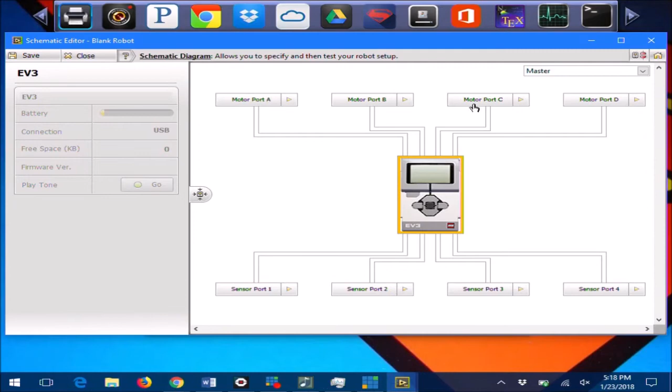Depending on what kind of robot you built, this is going to change. I have just the base robot built here. So for my particular robot, I've got a large motor on port B and port C. I have another large motor. So let's go ahead and do that.

Now again, if you're using the NXT kits, you will simply choose the NXT motor, and your brick will look like an NXT, the older style brick. It should be a very similar process.

One thing you actually can do in this, which works out to your favor, is you actually can name these, like I can say left underscore motor.

Another thing you can do from this window is check and see if the motor actually works. You can run the motor. I'm not going to do it now for the sake of time. You can run it forward, backwards to see if everything works. The encoders are working, so just to make sure all your sensors work.

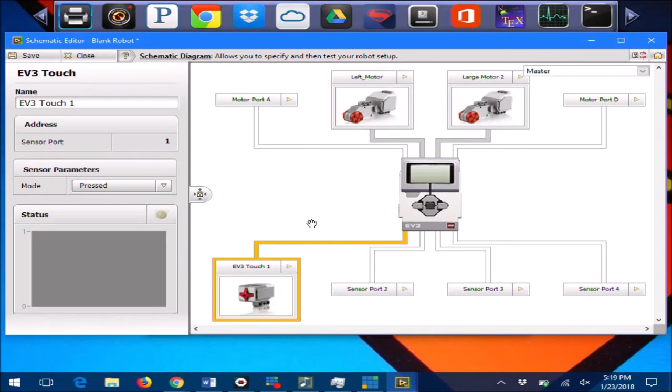Now in my case, in sensor port 1, I have a touch sensor, and in sensor port 4, I've got an ultrasonic sensor. Again, it depends on what kind of robot you have and you've built. Everybody's going to be slightly different compared to that.

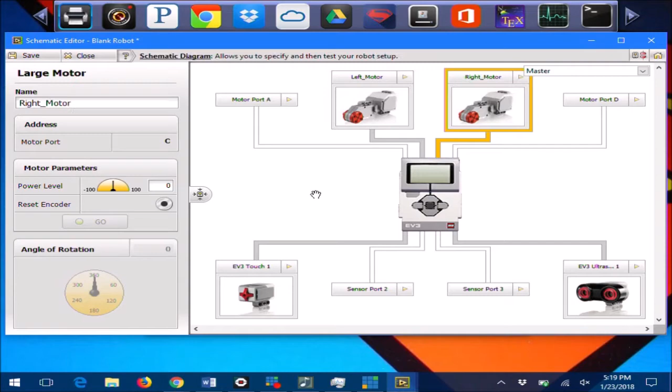Alright, so after that, again, I'm just going to leave my name the default. I might name this one right motor just to make it consistent here. And again, it's going to be on port C. I'm going to go ahead and save that schematic. I'll go ahead and close out of the schematic entry window.

And then I'm going to say a new VI, a new NXT or EV3 target. So I'll call this the same name, Lab 2 V3. Alright, it's going to come up with your two windows.

So again, if you've never programmed in LabVIEW before, this is going to be fairly new. The left window is called the front panel, and that's like your graphical user interface. You're not going to do a lot with that in this class until later on in the semester. The right panel, which is the block diagram, is what we're worried about. This is where all the programming takes place.

So I'm going to minimize this for a moment and then make this full screen. So if you look here at the bottom left-hand corner, it says EV3 USB. That's how you know you're connected to your EV3 or NXT kit, and you have the correct instance installed.

So again, kind of get you a little bit familiar. I'm not going to go over this in detail because there's literally hundreds of YouTube videos out there on the basics of LabVIEW and basics of this stuff. So we're going to go through this pretty quickly.

So at the very top, you've got the run button, the deploy button, which should be very similar to the buttons down here in the corner. Let's get rid of all this.

So the same thing as the deploy here is the exact same thing as the deploy in the LabVIEW software. This stuff up here you're not going to worry about so far.

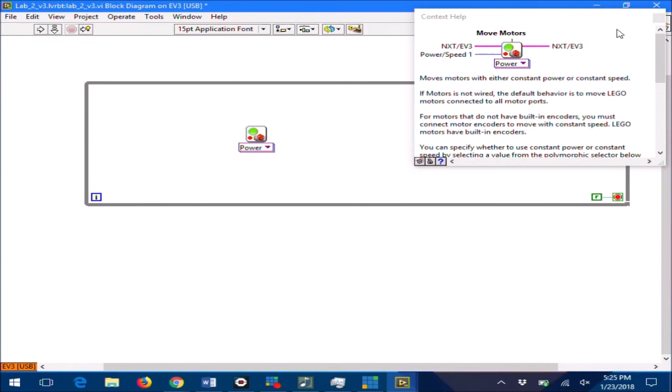So at any time when you're first learning LabVIEW, I would suggest keeping this little context help menu up. This shows you a description of what every single one of these inputs and outputs are supposed to be. You can also say detailed help, and it'll let you know exactly what each one of those inputs are supposed to be. So in our case, we know we can add some motors to the top of this.

That's what we're going to do. Again, I'm moving fairly quickly just because there's tons of tutorials out there on this information, and plus, I'm going to post this video.

So I can right-click on any kind of terminal, and it'll give me an options menu that's specific to that terminal. Notice how when I click on the NXT EV3, it gives me the I/O palette and the cluster palette. But when I click on motors, it only gives me the I/O palette and the numerical palette. So it depends on what node you press on—your context menu changes depending on what you press.

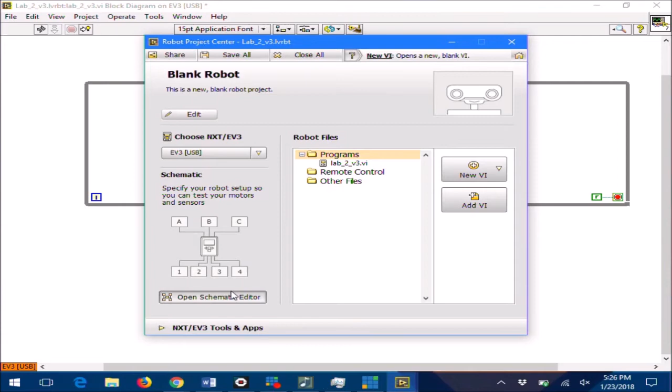So in our case, let's go ahead and create a constant for our motors. This is where naming your particular motors inside of your schematic editor is important. Recall that we named the motors left motor and right motor inside of this schematic diagram editor—left motor, right underscore motor.

That's actually going to show up here under our drop-down list. So there's my right motor, and it'll go ahead and add the right motor. It takes a few seconds to load that particular subroutine. Then I can add another motor using the drop-down box, and of course I'm just going to use the left motor in this case. If you use the smaller motors inside of your design, you can choose the little small motor from this as well.

So there's my two motors. Notice how the icon dynamically changes depending on what you feed into it. Before I only had the option for one power/speed input. Now I have the capability of doing it for two of them.

So let's go ahead and right-click on one of these terminals and say create a constant. If you recall in the other software, the EV3 software, 75 was just the default power speed, correct? Same exact thing. The reason why they're the same is this EV3 software is actually built on top of LabVIEW. So you don't know this, but you're actually running LabVIEW in the background—see here, powered by LabVIEW.

What it's done is it's added one more layer of abstraction to take away some of the stuff we're doing here. It just makes it real simple for kids and stuff to look at.

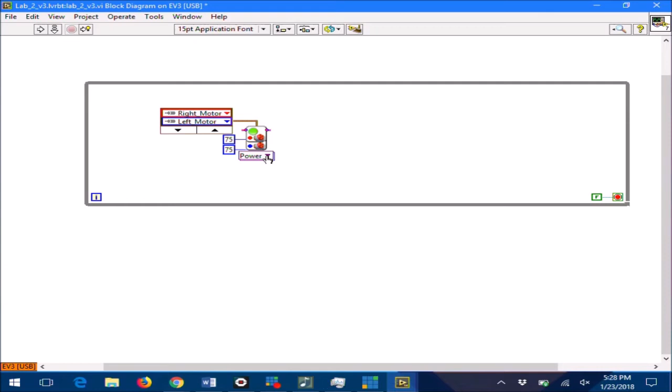All right, so I can go ahead and say create another constant here and have 75 for both of my motors. You also can choose a dynamic instance. Does anybody remember what overloaded functions were in C++? You can have multiple instances of the same function. Same exact thing in LabVIEW.

You can have the constant power instance of this particular function, or you can have the constant speed instance of this function. And the detailed help will explain all these different options that you have available to you.

So the first thing it's asking for that you may not know is you have to actually initialize the EV3 kit, whatever you're working with. Luckily for us, we already have the EV3 initialized at the bottom left because it says EV3 USB is connected. And let's do something else important here.

Let's go ahead and make this into a case structure. So go under your structures, go under your case structure, and let's only move the motors forward if, I don't know, the touch sensor is pressed—how about something like that? So let's go ahead and go to our I/O. We can go under our read sensor icon.

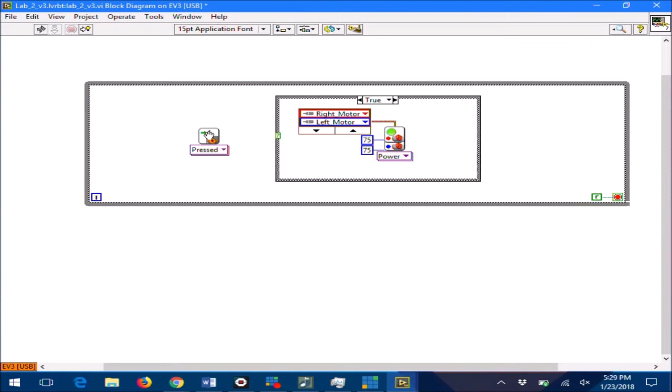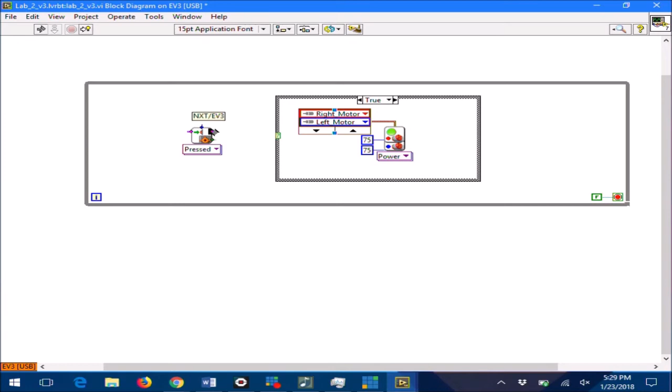Again, with the convention, the left sides are inputs, right sides are outputs. Notice how this says NXT EV3 - we've seen this before. That's an input to the next one, so let's tunnel that through into our EV3. This is analogous to passing variables inside of a function - nothing new here. We're just passing variables from one function to another. You essentially do that in LabVIEW by connecting these two panes to each other.

Let's go ahead and look at the output. Another thing I want to mention, if you've never looked at LabVIEW before, is the color convention inside of LabVIEW - the colors are significant. This pinkish color is actually a string, the bluish color is an integer, doubles are orange, Boolean is green - true, false. I'd suggest going and looking at some of these tutorials before you get started programming.

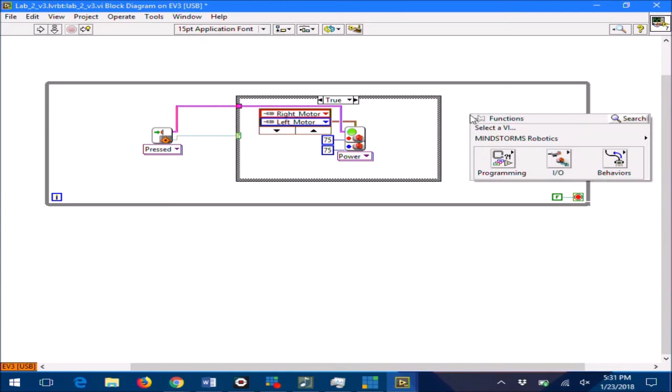So in this case, this particular case structure is looking for a true, false, some kind of Boolean input. The case structure is analogous to the switch statement in the old program we used - it dynamically changes depending on what you pour into it. I can port in this yes/no Boolean answer into the case structure, but let me show this - let's copy this 75 block, Control-C, Control-V, tie that into the case structure, and now it becomes a numerical case structure. Does that make sense? Everything dynamically changes based upon what input you give it.

A lot of this stuff is not really given to you - you just kind of have to figure this out over time. Feel free to email me if you have questions on how to port one code to the other, but make sure you include screenshots of what you have so far.

Now, has anybody got any questions so far? I know it's throwing a lot at you at one time, but again, there are a lot of tutorials out here on this. Yes? Yeah, still do Thursday.

Still do Thursday. It's due Thursday because what you were supposed to do is make like a 10-icon program in the EV3 software. How many of you actually did that? Simple program - it just goes, stops, end, something like that. You guys should have no problem.

If you didn't do that, what I would suggest doing is rethinking your algorithm from Lab 1. Even though I said try to make it as close as you can, if it was me, I would rethink what I did for Lab 1 to make it as simple as possible, to meet the minimum requirements.

What are the minimum requirements? Anybody remember? Three sensors that do something. You can just touch the sensor, touch another sensor, and do something with the ultrasonic, and that's it. So that's what I would suggest - it may take you a few extra minutes just to revamp your code inside of the EV3 software, but make something very simple.

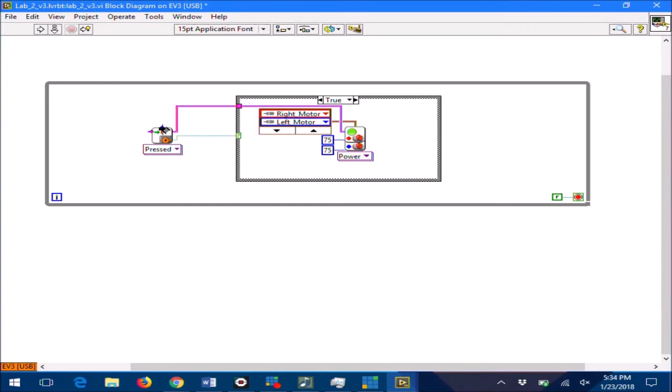Okay, I've actually got to exit out of this program because it's taking up the EV3 instead of LabVIEW, so let me exit out of this. That's another important note too: you can't have both softwares open because the EV3 is going to recognize itself in one of the two softwares and it won't be available in the other.

So now I should be able to disconnect, connect it again, and it should show up. Let's see what happens here. So let's choose our EV3. Everything's okay, alright, so let's go ahead. Again, there's two options: there's this run and there's deploy. We use deploy typically with our other software. So I'm taking a second to download. It does the exact same sound as the other software when it downloads.

So again, I'm going to go into my robot, and it should - let me pull up the document camera - and it should show up as whatever you named it. In this particular case, it's Lab 2 V3. Does everybody see that? That's what I called it inside of LabVIEW, so everything should work the same.

So I go ahead and press play on this guy. When I press the sensor in, it runs. It's just going to keep going because I don't have anything to stop it from running. Top left button is the stop for that. Okay, alright, so any questions so far on what I did? Everybody good? Or sort of good?

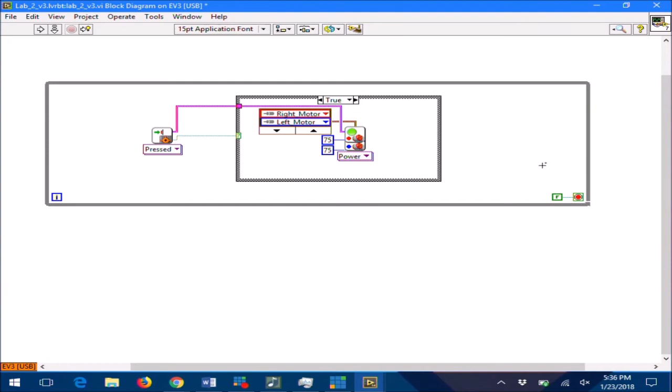Is there a way you can change variables or put variables in stuff? Oh yeah, I mean there's basically anything you can do with regular traditional programming you can do with this.

Speaking of which, if you get really stuck inside of LabVIEW, but you know essentially what the C code should need to do to make the same action, what you can do is - let's see if they have - I don't think this particular form of LabVIEW gives you that option.

Okay, but yeah, definitely the main palettes that we're looking at for this assignment is going to be the structures palette that gives you your while loop and your case structure, which is going to be your switch. Anybody do the Boolean operators in here, like the and, or the stuff like that?

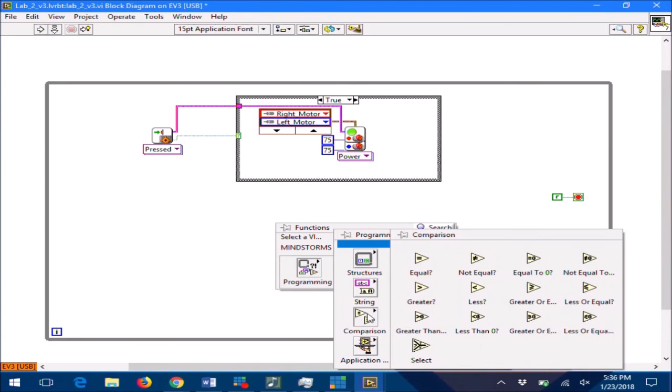So that is located under programming, under the comparison, there's equal then. You can also do the Boolean here, which has and, or, all your different kind of Boolean operators are here.

Again, if you find yourself spending a long time with this and you can't get your exact code ported over, just do something simple on the other side. See what I'm saying? I don't want you to spend forever on this. I just want you to kind of get familiar with LabVIEW.

Okay, so let's go ahead and look at adding another sensor to this. The only other sensor that I have on my robot now is just the ultrasonic sensor. That's all I have, that's all I had time to build for.

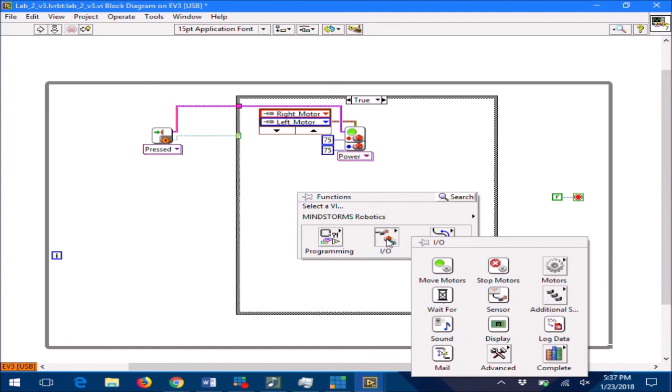So let's say that if the sensor is pressed, it goes forward, but inside of that case structure, which again will automatically grow depending on how I move it around, let's go ahead and introduce another case structure for the other sensor. So let's go ahead and get the ultrasonic sensor.

So we can choose - it defaults to the touch sensor. I can choose the EV3 ultrasonic. Again, if you're using the NXT kit, you're going to choose from these particular sensors here, okay? So let's choose the EV3 ultrasonic.

And again, the same options are available to you, so you can choose centimeters, inches, or just listen for. I'm going to choose inches. And again, you have to tie in your EV3 into it because you're passing that same variable into that particular block.

Again, in this case, it defaults to port 1, so I'm going to create a constant here. Now, my ultrasonic sensor is actually on port number 4. Let me just double check that here.

Yes, on port 4. So I want to choose from the drop-down menu to program port 4. If I left it at port 1, it wouldn't have worked. Typically it ports it over for you. I don't know why it didn't, but typically it does.

So in this particular case, the output is important to us. The output for this particular sensor is going to be a single precision. Remember what I said about orange? What data type is orange? Double, right? That's what's coming out of here.

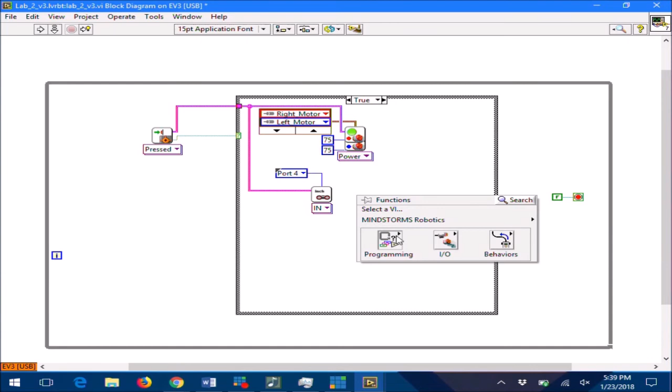So I can say let's go ahead and tie that into a, we can go ahead and convert. That actually would be a good idea to convert this. So let's go ahead and convert the single precision just to a, I don't know, a byte integer maybe. Let's see what happens here.

The reason why I did that was because typically your case structure only accepts integers, booleans, and strings. That's basically the only inputs it takes. So let's go ahead and look under a case structure here.

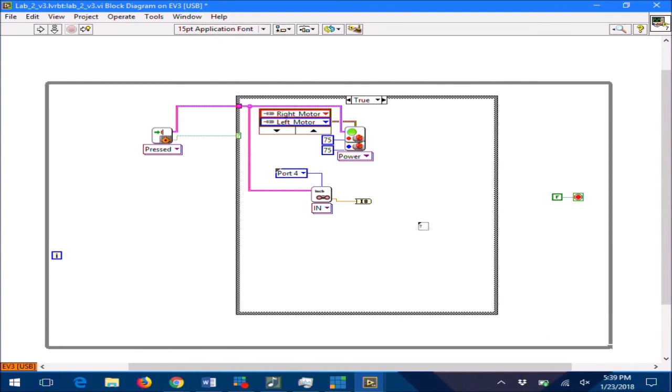And again, it starts off defaulting to a boolean, accepting a boolean. But if I tie in a numerical to my case selector, which is what this little question mark is, it automatically updates to some kind of numerical update.

Let's say if I press the sensor, actually I can do this right here as well. So what do you want to do? Let's let y'all be interactive for a second. So if I press the touch sensor, I get into this case structure, and then I want to do something with the ultrasonic sensor. What should I do? If I read a certain value, should the wheels move or something? Something like that, or make some noise.

All right, okay, that's fine. I'll do that too. So let's do a quick comparison.

Another thing inside of LabVIEW, if you see the X here, that means there's an error. In this particular case, I've disconnected a set of wires and it goes to nothing. It says wire has loose ends. You can click on that and hit delete, that'll delete your wire. That'll also tell you if you have any errors in your program by looking at the run button. If the arrow is not broken, you're fine. If it's broken, that means you have some kind of error in your code.

So let's do a quick comparison. Let's go under the comparison palette here and say, let's say if the ultrasonic sensor is less than, I don't know, how many inches do you want? Create a constant. So let's say if it's less than 7 inches, what do we want to do?

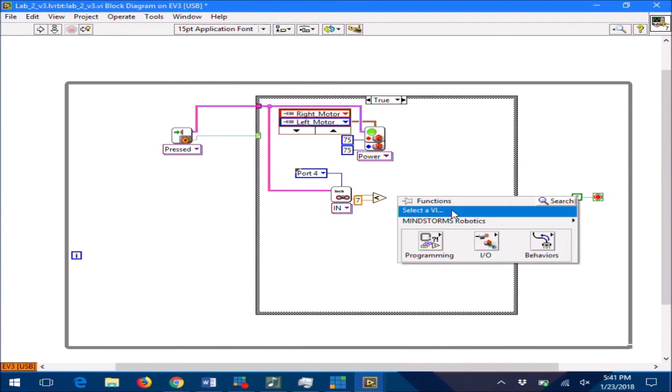All right, so let's go ahead and choose another case structure here. So if it's less than 7, that output's going to give me a true or false value, okay? So that's going to go into here for my true-false indicator, okay?

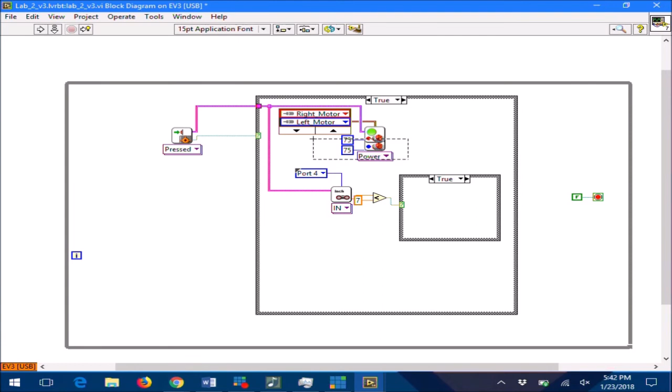Now, so if I press the sensor and the ultrasonic sensor is less than 7 inches, then should I move forward maybe? Let's try that, okay? Let's just go ahead and move this portion here inside of this case structure. I need to, of course, reconnect my loose ends into my program. Everything's good to go now.

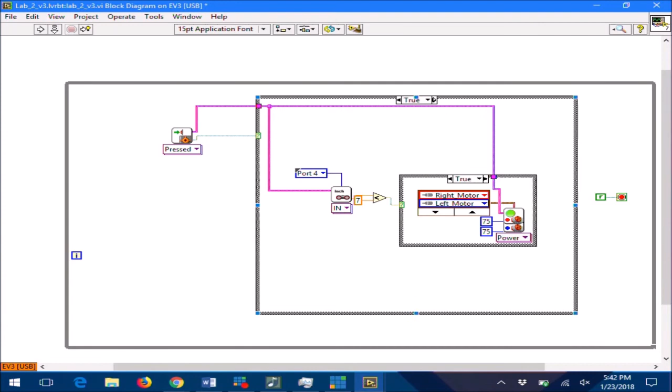All right, so another thing we have to take into account typically is your false case. I won't do that for sake of time, but typically an error you might get is if you're doing something for a true case, it has to be in the false case too.

And so to the guy in the back's point, let's go and add a sound to this. So it's going to go forward, but while it's going forward, let's go ahead and make a sound. So here's the sound control. There's tone, you can play a sound file. I think it gives you the option to create a constant here. I can choose where that particular sound file is.

Let me go ahead and choose a tone for instance. Let's play the piano red song, I don't know what that is, but we'll go with it. So we're going to tie that into our NXT EV3 connector, and that's all you have to do is tie it into it.

All right, so what's this program supposed to do? Somebody walk me through it. What's it supposed to do? You guys got to read this, not me. I know what it did, I just did it. You got to know what it does. Press the touch sensor, then watch it happen.

Okay. I mean, it doesn't really stop the motors, does it? Right? It just kind of keeps going. Okay, so we'll just roll with that.

Let's go ahead and save our program, and save often. We have to do that all the time. Let's go ahead and deploy. Takes a second, should be deployed. Now let's see if I can get to that program again. Just to reiterate, it should be the same name that you gave it in the LabVIEW software. All right, let's go ahead and press play.

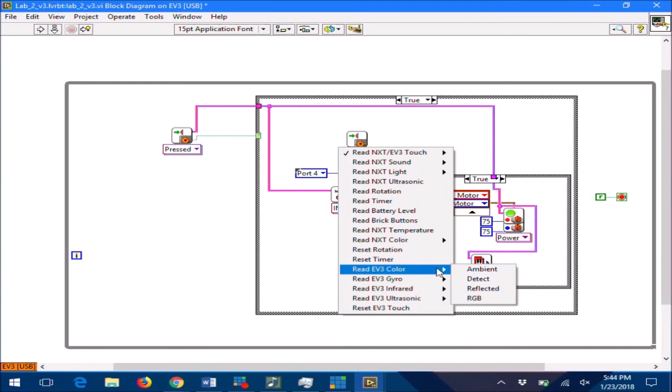Can we run the motors based off rotation or angle? Oh yeah, there's also that as well. Under I/O you can look at the motors—I believe it's under motors right here. So you can check motor status, read the sensors from there, or move servos. It should be somewhere in there. If not, a quick Google should be able to get that as well.

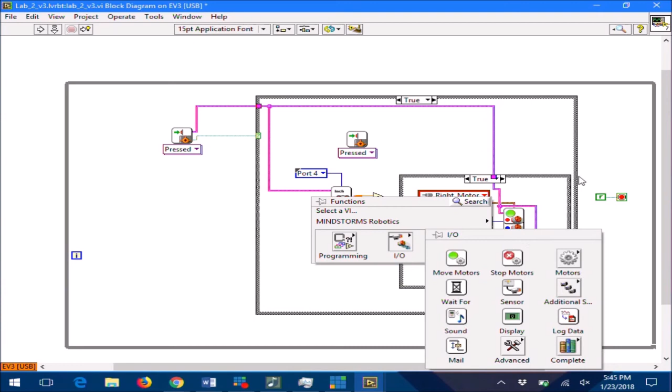We had to do something like a sequence, like a ladder sequence, I think it was called. Can you talk about that for a second? Sure. So the only two structures I've gone through so far are the while loop and the case structure. Another structure very similar to the EV3 software is called the flat sequence structure. Let me give myself a little room here.

A flat sequence structure is exactly as it sounds—it does stuff in a certain sequence. It's supposed to look like old movie film, doing one frame at a time. It's a little outdated, but that's how it goes.

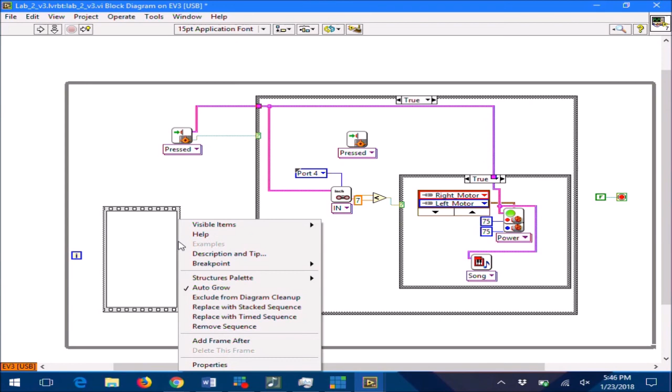If you right-click on the right-hand side of the flat sequence, you can say Add Frame After, and keep adding these frames. Essentially, LabVIEW will perform whatever action you have in this sequence, then you'd tie, for example, this EV3 block into the next sequence, and it'll go do the next particular sequence. So if you have a sequence in the EV3 software that says move forward for 2 seconds, then stop, then back up—whatever it may be—a flat sequence is probably the way to go.

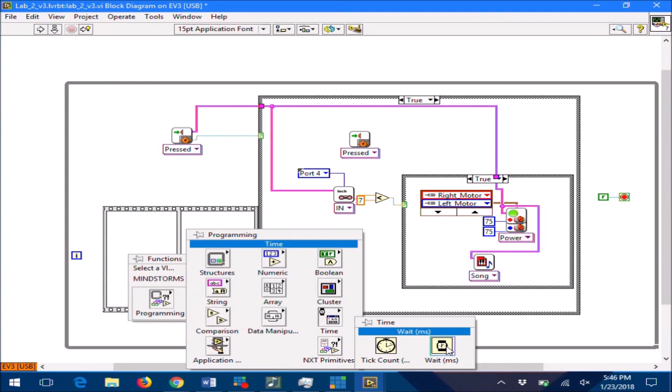So talking about waiting, I'll go over the time period for that. If you look under the programming structure, I believe it's under Time—you can wait for a certain number of milliseconds. So if you want to go forward for 2 seconds, you'd have the same exact motor block here going forward at a 75 speed. I'd paste that inside of here. Let me move it out a little larger, move that up slightly—again, I want to tie my EV3 into here.

Let's say I wanted to wait for 2 seconds—this is in milliseconds, so how many milliseconds are in a second? 1,000, right? So that would be for 2 seconds. That would move the motors forward for 2 seconds, then after that is complete, it would move to the next sequence to do whatever your heart desires—make a sound, make it go around, I don't know. Do your homework, if you figure that out it's fine, no problem—solve a Rubik's Cube. It should be good to go.

Now again, just to reiterate, inside of your video, you're going to need to show me some of the code. You can just show me with the camera, that's fine, explain it. If it's rather large, make sure I can read it. Stop and focus for at least a half a second so I can see. Don't just do a quick 'oh, here's my code' - I need at least a half a second for the camera to focus, okay?

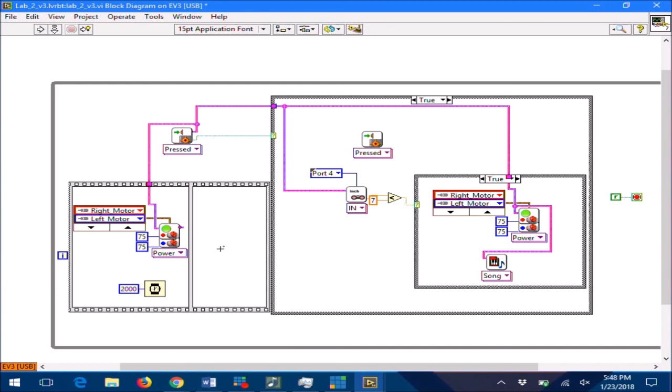Again, some of you in your video for Lab 1 didn't include the code at all. I guess I kind of looked over a few of them. So you have until Wednesday night to redo that, okay? I would suggest just adding it into the video. You can use whatever editor you want. I use Microsoft Movie Maker - it's pretty simple, it's free.

Can you declare a variable? Yep. So declaring a variable, you go under Program Structures. You can say a local variable, right? And again, you can read more on this online - they have plenty of examples.

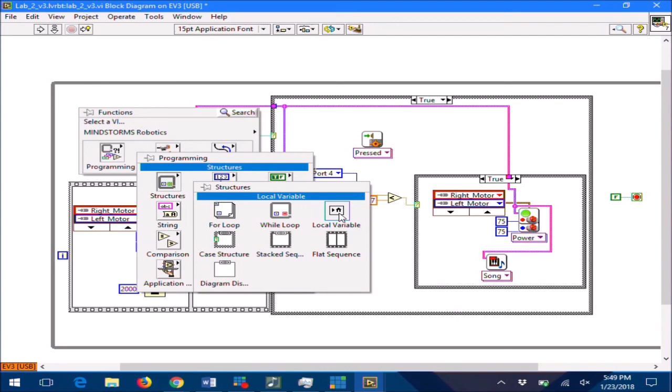Whenever I tried to do the variable, it said something about using the front panel to name the variable. Right. So yeah, if we go back to the front panel here, again, I didn't want to throw too much at you at a time. There's a lot of videos on this specifically, using local variables and global variables.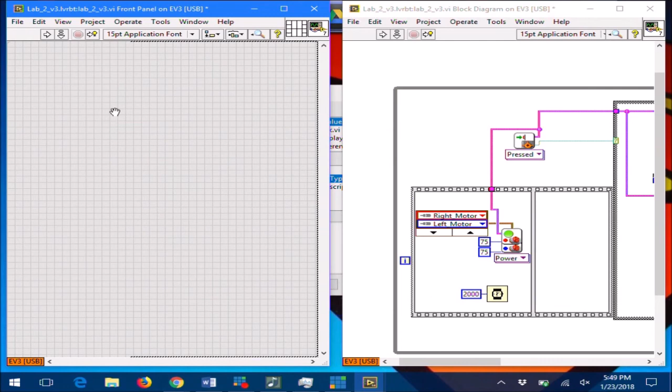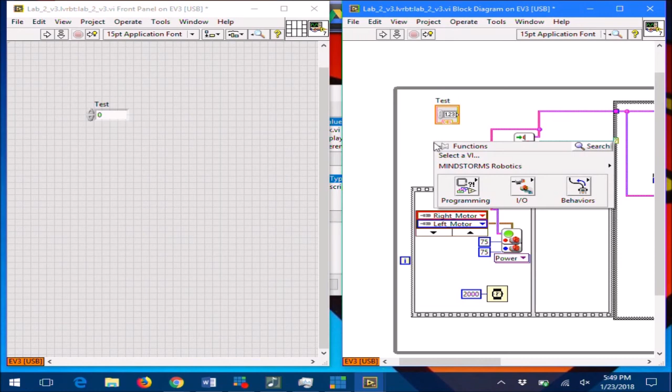But let's just say you had a numerical control, for instance. I could place that here, and the exact same control pops up on the block diagram. So I can call this, let's call it 'test' just for a variable name. Now when I go and select a local variable, I can tie that into my local variable - I've got to choose a local variable. So there's 'test', okay? What that does essentially is it makes it to where you don't have to run a single wire all the way somewhere else. You can just kind of say an instance of it.

So if I right click on this, I can say change to read, where it reads in that value, or I can say change to control, where I'm controlling. It's just a node - it's just like in PSpice. It's just controlling a certain node, sending something into it.

So if I want to say an if condition that test one variable should be one, can I do it? Well, you wouldn't use an if statement. You would basically use the case selector, or case structure, which would be basically your if-else statement, because true-false is the same thing as if-else in this particular case. And you can even choose that. Can you update the variable? Oh yeah, certainly - you would just change this to read or to write, and whatever you tied into that local variable, it would update that variable.